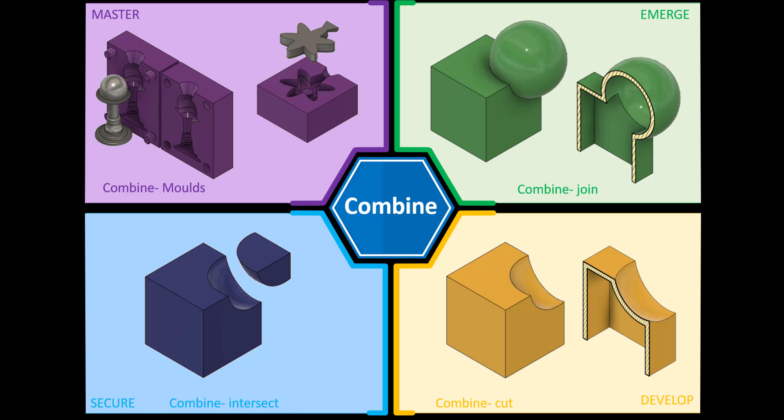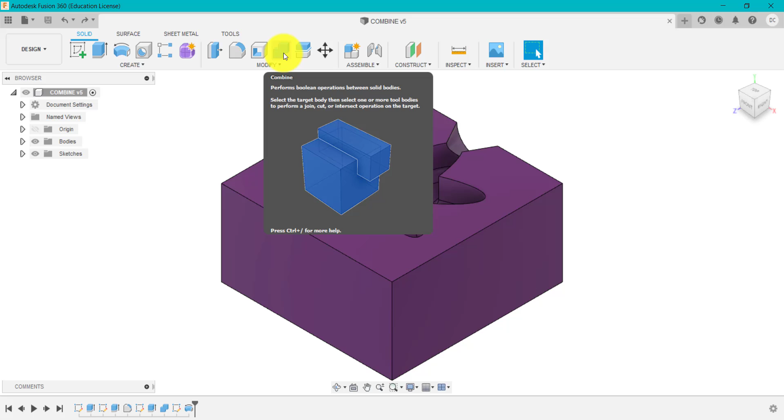What we've got on screen here is a mould design which we could use for, say, pewter casting. We're going to have a go at creating this design using Fusion, and one of the key techniques we're going to use later is this combine tool. If we click on the plus to create a new document, we're going to use this model here as a reference. You can find a link to this file in the description below.

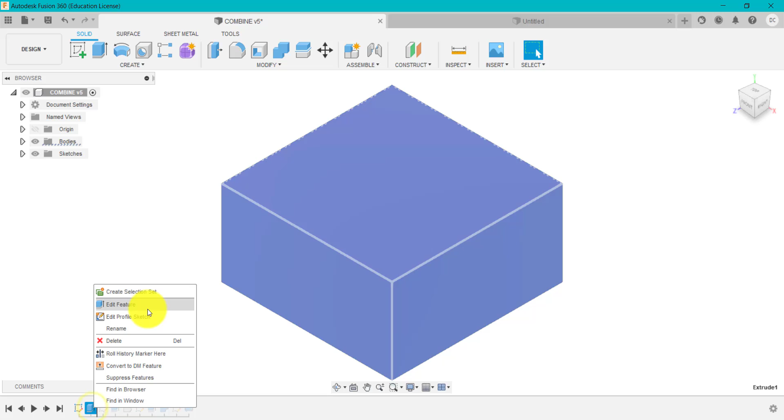The first thing I did was create a 50 by 50 millimeter square, and then I extruded that... let's have a look... I extruded that one-sided by 25 millimeters.

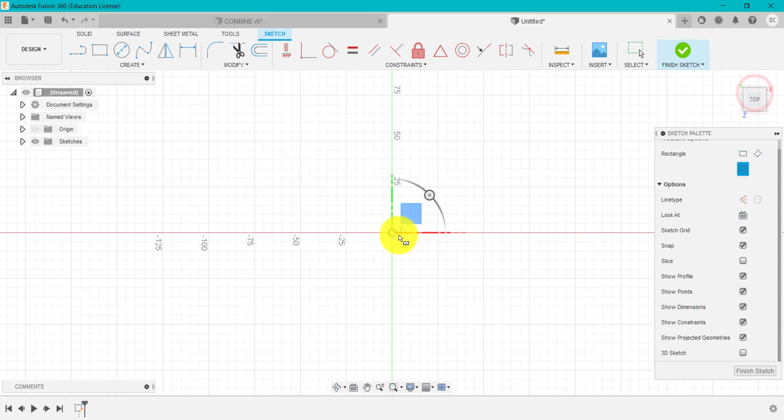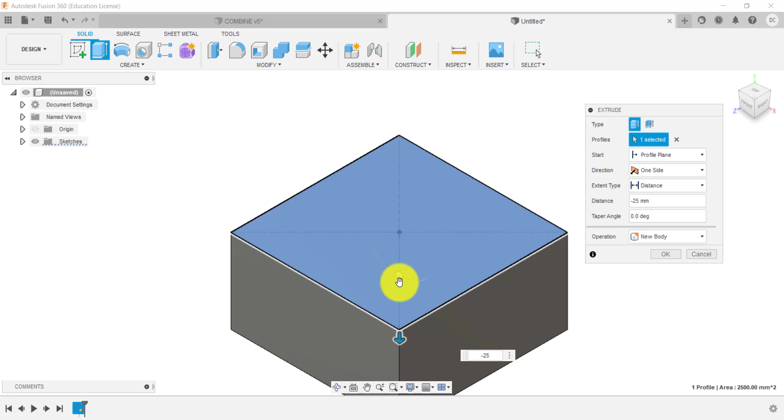If we go up to sketch on this bottom work plane, we go up to create, center rectangle. I just need to make sure I haven't got my 3D sketching turned on, to turn that off. I'll click and type in 50 by 50 using the tab key and click enter. If you press E for extrude, go up to solid extrude, select this shape, and go minus 25 because I want it to go below, and I want to create a new body. I'll click OK. So that's the first bit done.

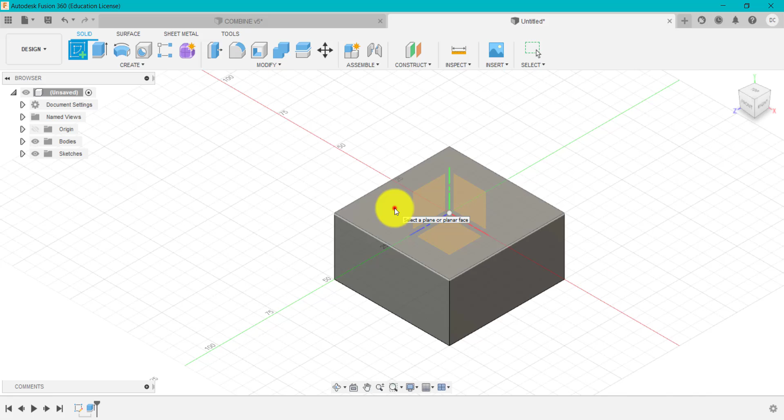Come back to the reference model. What I did next was, if we go to edit, I created this design as you can see here. So we're going to go back, click on sketch on this top work surface, go up to ellipse, and drag this out like so. Now I'm going to dimension it afterwards using the dimension tool.

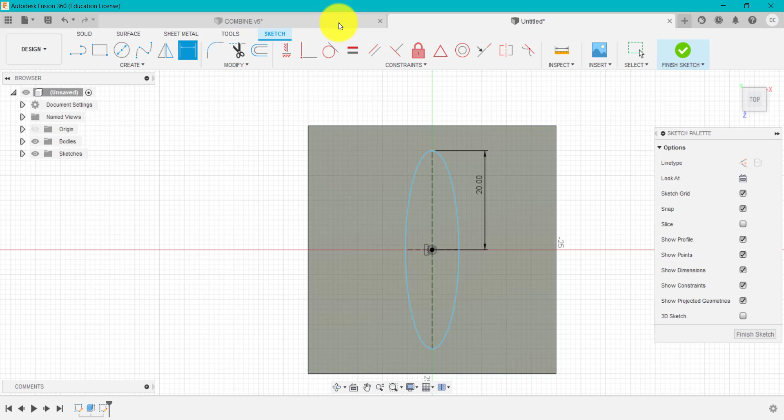Type in 20 there. If we go back to this reference model, okay, the size of that, if we round that up to 5. So using dimension, dimension at 5 millimeters.

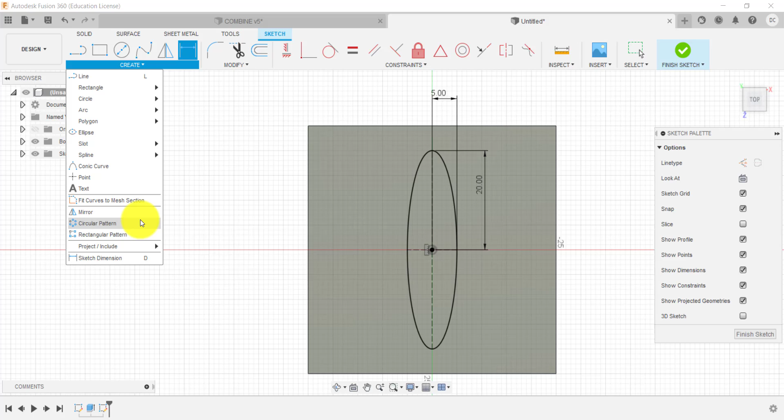We're then going to go into create, circular pattern. Object to pattern is that ellipse or oval, center point is the origin, and we want, say, 5 in total for this design. I might want 3 - it all depends on what you want. So I'm going to go for 3, like so. That can be changed by just double clicking on that little pattern icon there, and you can update that.

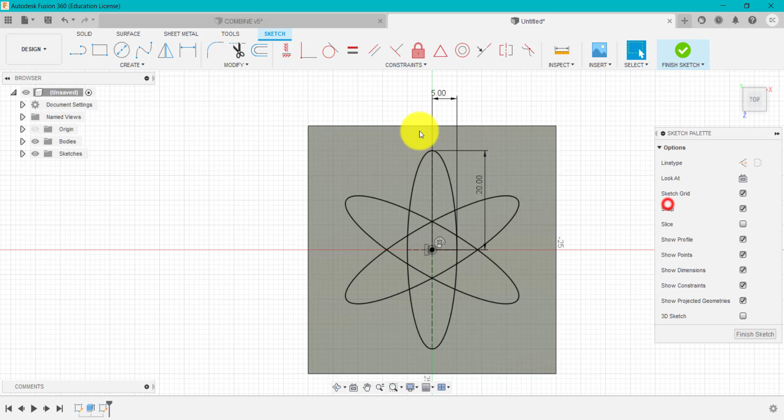So if we go back here and just save this - what I did next was I created an extrude. If we go into here, I created this as a separate body, and if we have a look at the dimensions, it's 8 millimeters in thickness.

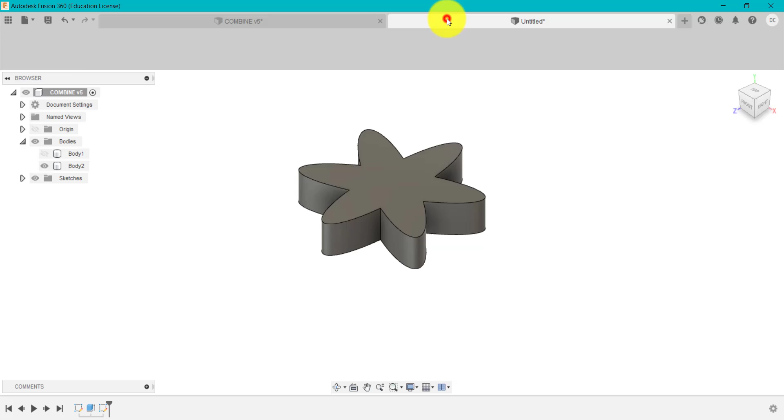So if we go up to home, I'm going to go solid, extrude, select what I want to extrude - I'm going to select all these individual bits. I could have drawn a box around that actually to save a bit of time. I'm going to go minus 8 because I want it to go down. It will automatically go to cut, but I want to create a new body, and click OK.

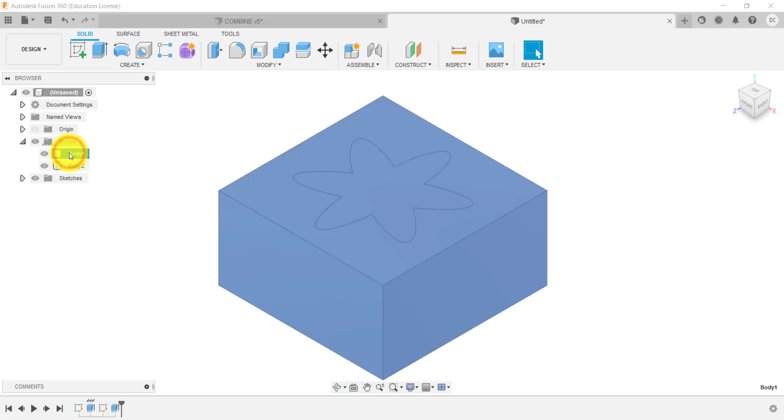So what I've got here at the moment is this main body, again in the design. I'm going to double click on that and type in 'design' - so that's the actual design - and then that one I'll type in 'mould'.

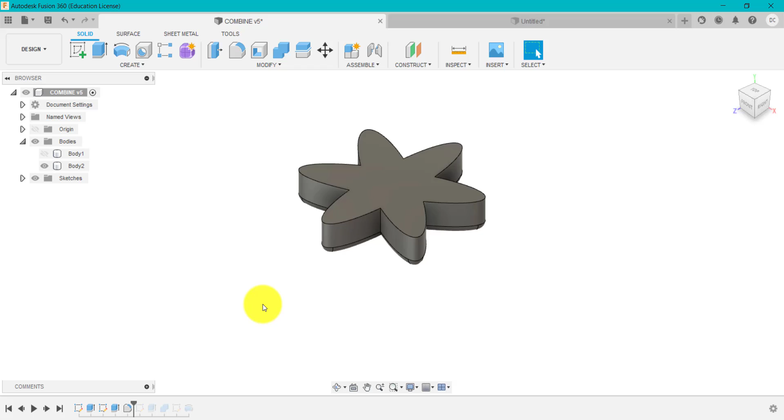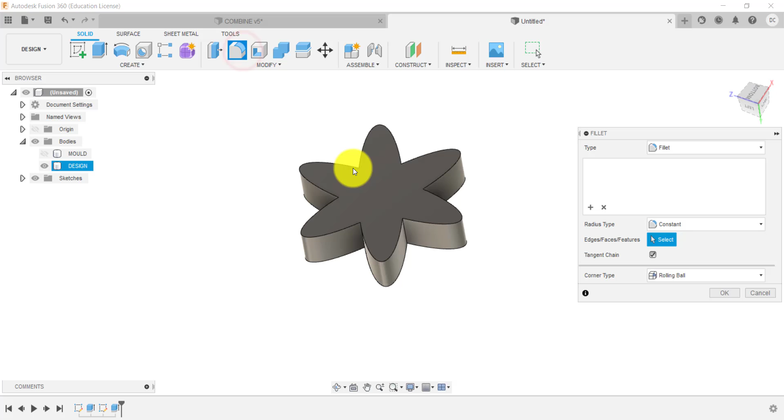What I did next is I added some simple fillets on the edges - I think that's just a simple constant fillet of 2 millimeters. If we go back into our model here and spin that around, I'm going to select these edges, 2 millimeters, holding Control to select more than one edge. That error will go away now I've typed in and selected those, and I've rounded that off.

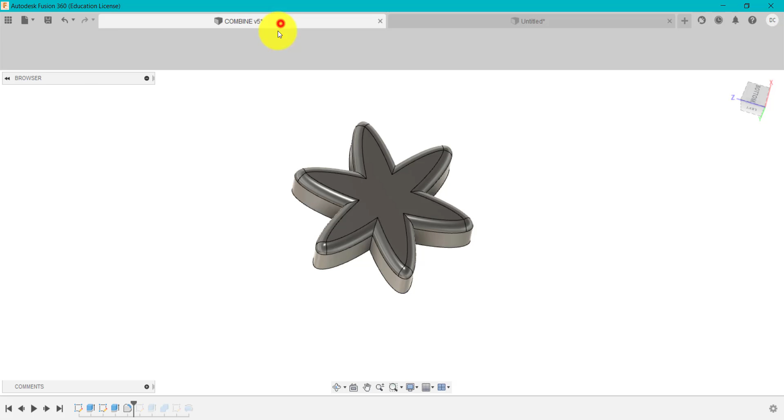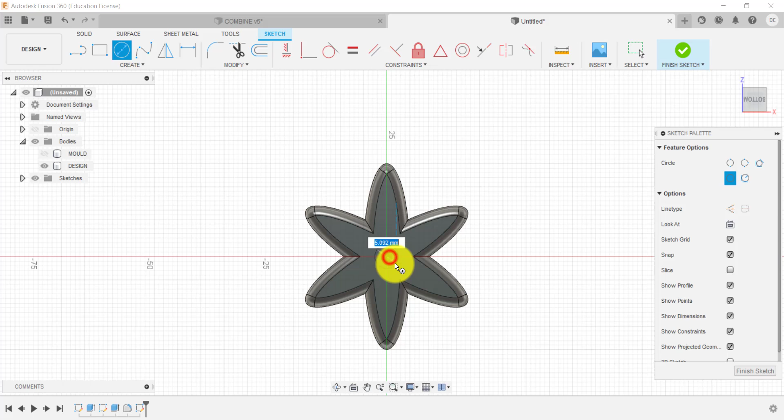So I could go on here and add more details. I think what I did next - let me let Fusion catch up, here we go - I created a circle and cut that in. Let's have a look at the sizes: 8mm in diameter, and I went in 2mm. So we're going to click on that surface, sketch, C for circle, 8mm, E for extrude, minus 2, go to cut and click OK. So I've created that little detail now.

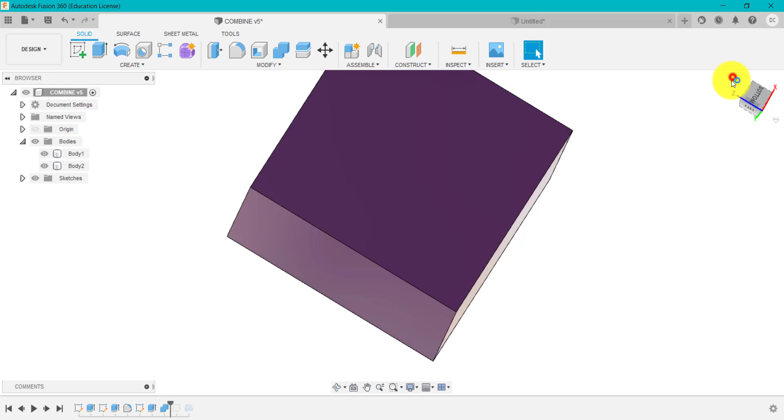And then this is the fun bit. I've now used this combine to create this mold here. So you'll see what happens here is I've subtracted my design from that main body.

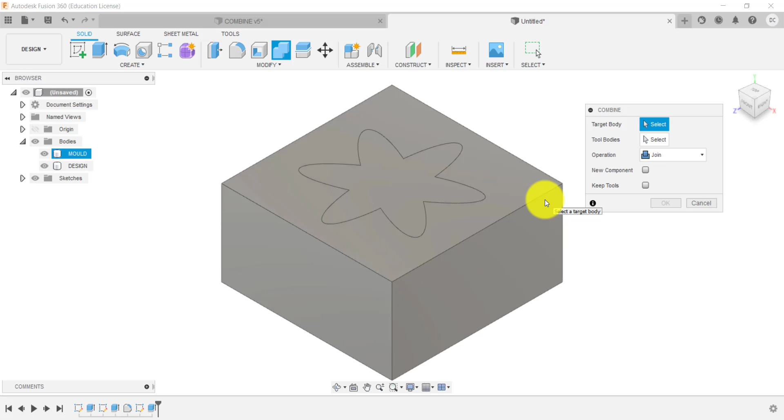So if I go up to here and just turn that on, flip this around, and what I'm going to do is come to combine. So target body is the mold itself, the tool is the design I want to create, and I'm actually going to click on keep tool, so that will keep that design rather than absorbing it into the mould.

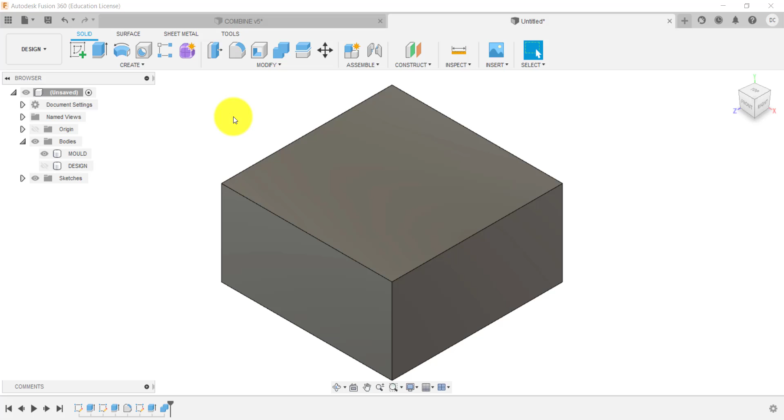Click OK. If I then just hide the design, now I've made a mistake there, because what I've done, if we go back, just got to be careful, is I've clicked join rather than cut. So just make sure you select the right option, and I've cut that. So I've subtracted that design there away from this mold.

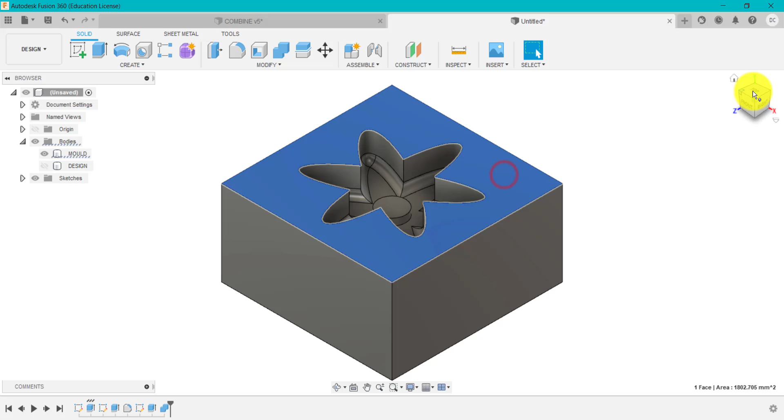So what I need to do now, if we click on this top view, if we want to say pour pewter into this, we need to create a feature where the actual metal is going to be poured in. So if I zoom into here and click on that, click sketch, just hide the sketch palette.

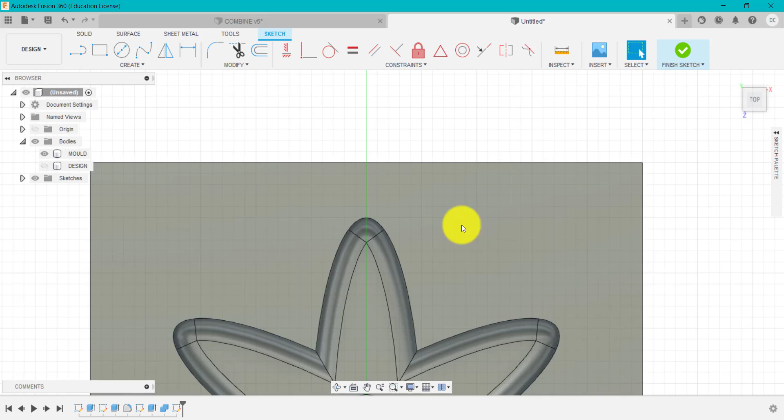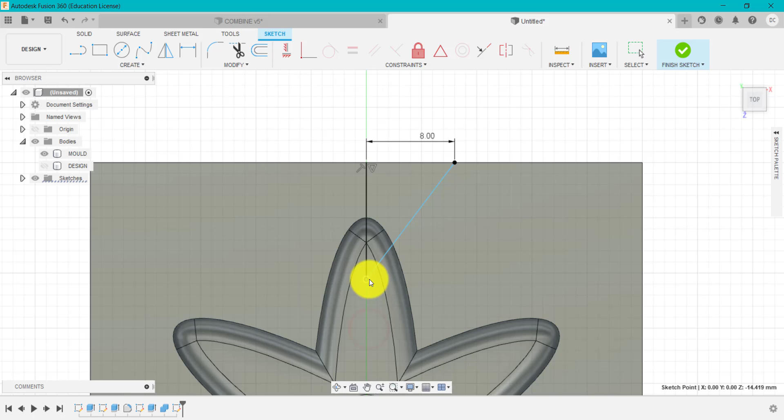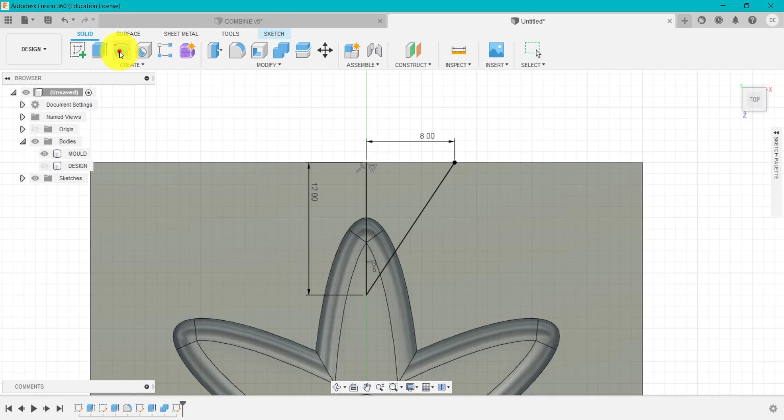Obviously I don't want it to go right down into the middle of the design, and if I really want to dimension that, I'll add a dimension of, say, D for dimension, 12mm, something like that. I'm now going to go to solid, revolve, profile, this is the profile here.

I can select that as well if I wanted to. The axis is this line here. I want it to cut rather than create, and click OK.

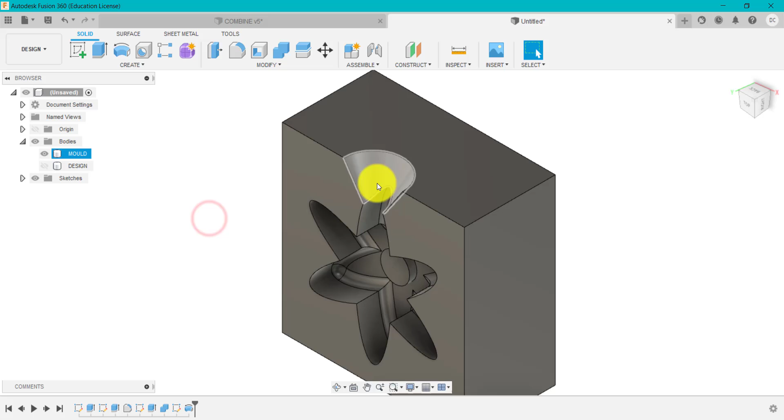And you can see here, this is where the pewter can enter. And then what I can do, if I really want to as well, if I can click on this surface here, could I use the corner rectangle tool just to drag a square over that.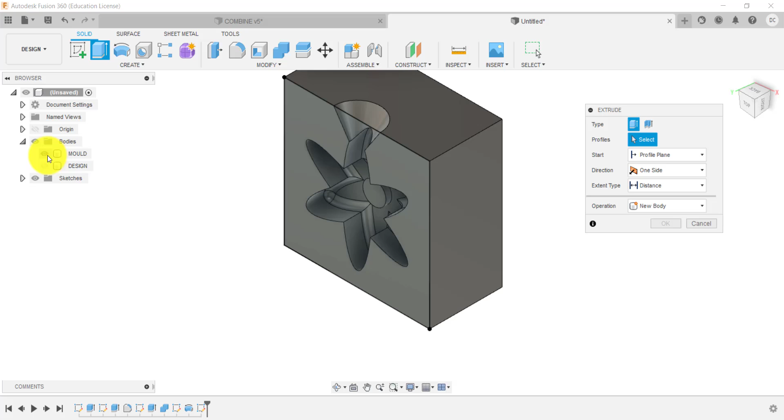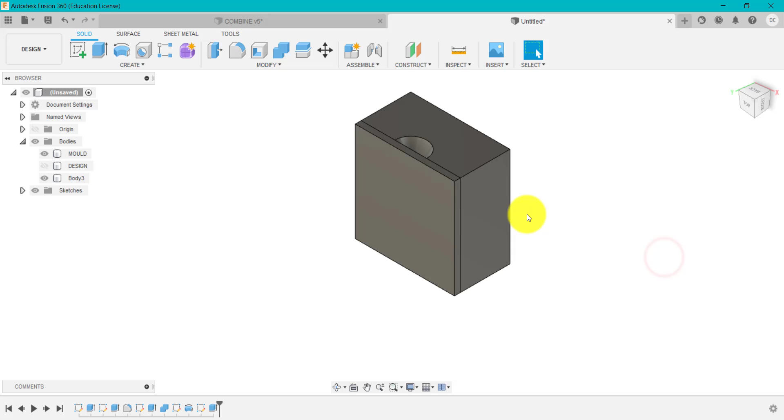I'm going to go E for extrude, and I'm going to hide the bodies actually, and just select all that, turn the bodies back on, and say I was going to put a piece of, I don't know, ply up against that, like a thin piece or something, like MDF, I might go say 3mm, new body, and that creates sort of a little blank to cap that off.

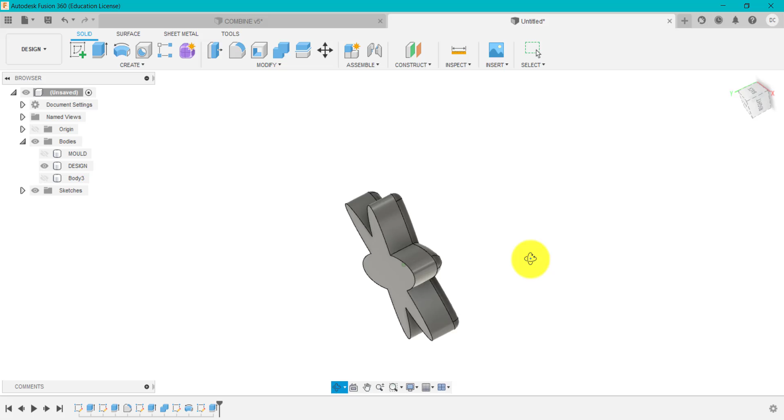So then what I can do then is pour the pewter into there. That will fill that cavity. I can then remove this, and then what I'll have then is that design with this top bit, which I will have to cut off later, and then I'll have that sort of pewter design.

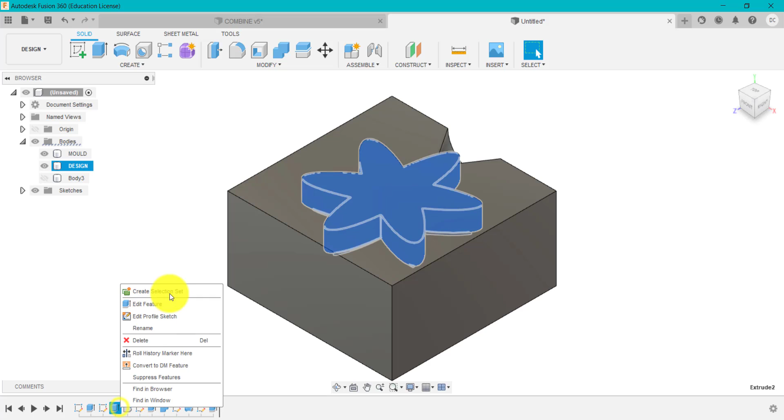And again, if you need to, if we just turn some of these things back on, if we need to go back into here and edit the sketch or anything, or a feature, so for example, if I wanted, say, instead of that being 8mm, I want it slightly bigger, so 10mm, what will happen is everything will update automatically, and that now is 10mm in depth.

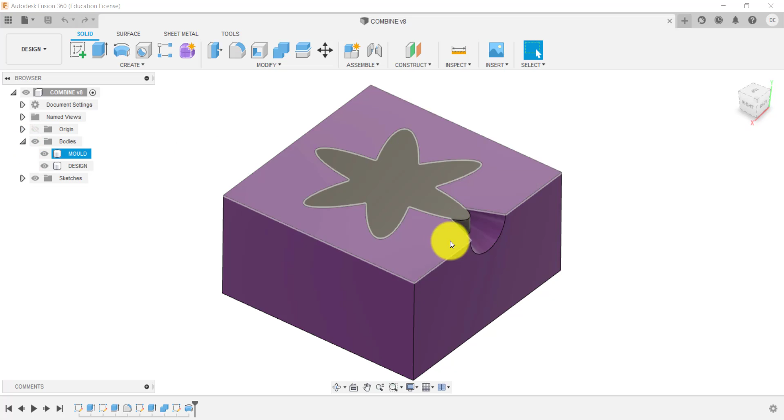You can add a final little detail to show what it would look like when it's cast. So as you can see here, I've created this section here where the pewter would be poured in. And what I'm going to do is I'm going to revolve that 180 degrees and merge it into my design so you can actually see what it would look like.

So if we turn the sketch back on, which I use for that, and I'm going to hide the mould for now. I'm going to go to revolve. I'm going to select this part here, go to axis, and select that. Now rather than cutting, I'm going to go join.

Rather than go in 360, I'm going to do it at 180. Or do minus 180 to flip it. I'm going to join it and it's going to join into that.

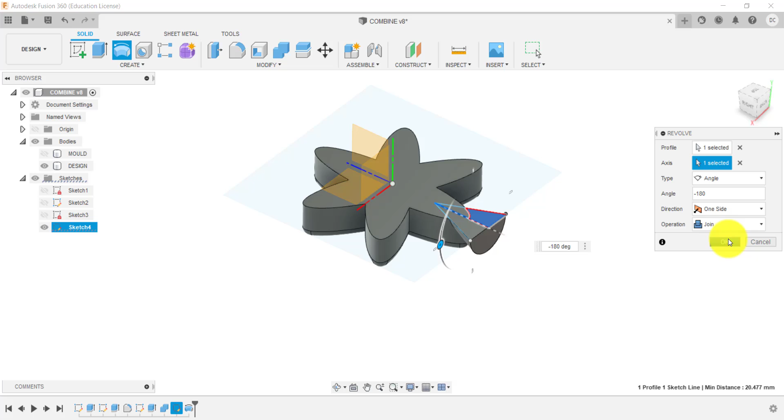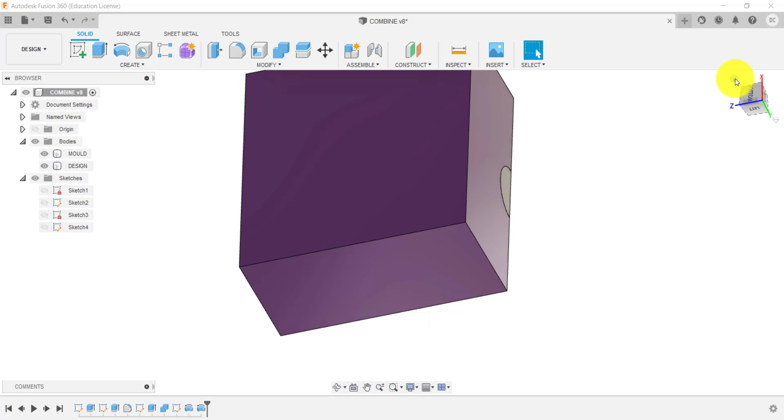And then what you can see there now is that's what it would actually look like once it's been cast. And of course what you do is you'd cut that off and file that down, to remove that, and then that's what you'd have as a final design. But that's how you can add that little detail just to show what it would look like once it's been cast.